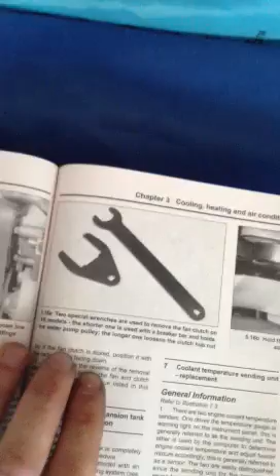Hi there. This video is for Ford Ranger owners who are trying to remove their fan clutch assembly or trying to remove the assembly so they can get to their water pump. The problem I had is that the manual that I have, which is the Haynes repair manual for Ford Ranger pickups, shows the use of a special tool to get at the fan clutch assembly.

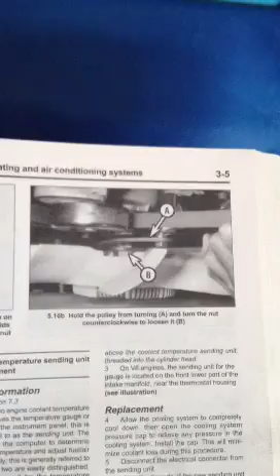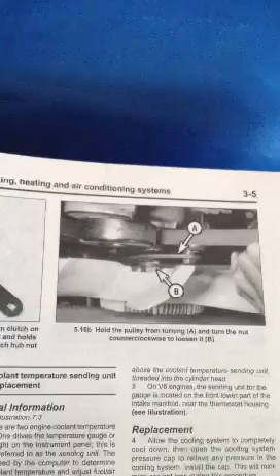The problem is that I have a 2006 Ford Ranger, and the equipment inside my engine bay doesn't match what comes in the manual. The problem is that there is nothing for this tool to grab onto. The nut on the axle of the fan clutch assembly is there, but there's nothing square to put any kind of wrench on the side of the water pump or the water pump pulley.

So I tried several things. Looking at videos, I tried various kinds of strap wrenches to hold the pulley still while I turned the nut. No luck. I even tried heating it up with a torch. That didn't work either. What I did find worked, and I'll show you guys how to do this in just a second, is I came across another page in the book which shows using a crankshaft pulley holding tool in order to hold the water pump still while I turned the nut on the fan clutch assembly.

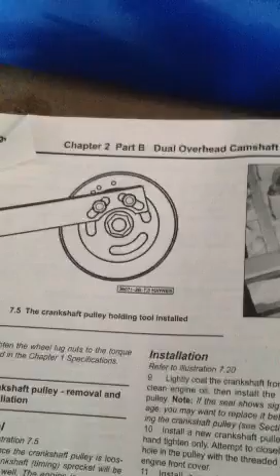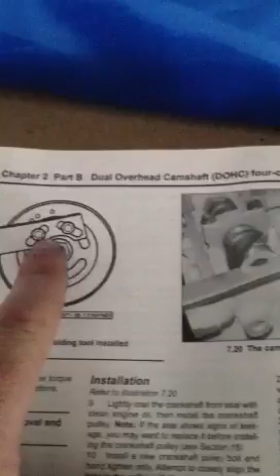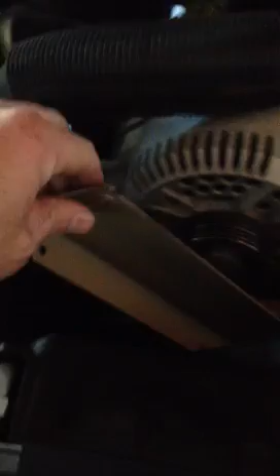I have a crankshaft pulley holding tool, but I guess the slots are too big. They just didn't work for the water pump. So what I did is I took a regular piece of shelving strut here that comes on these type of shelves that I have in my garage, only a little bit beefier, and I cut out holes that match this size. I just took some measurements on the water pump, and I attached it.

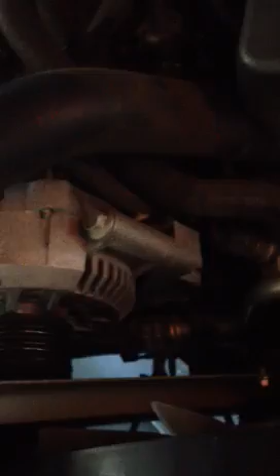Let me get the drop light here for you guys. I took off the pulley to the water pump and just slid it down the shaft of the fan clutch. You can't take the pulley off, obviously, because it hits the fan. So I did drill those two holes, little slots, and attach that to the water pump. And so now that holds really still. And if I can demonstrate, you can hold that still.

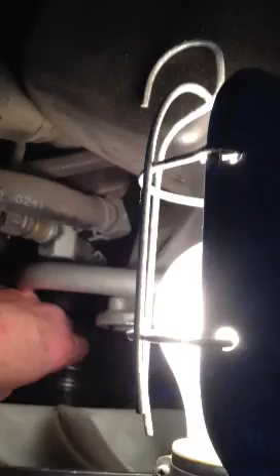So then you move the pulley out of the way, and you can see the nut that you have to put a giant wrench on. So what you're going to do is you're going to take a huge adjustable wrench. This is how big of a wrench I'm using here, a big old 18-inch adjustable wrench, or if you have a really long 20-millimeter wrench. So you're going to put it right there.

So we've got our piece of strut right there holding the water pump still, and then this is the fan clutch nut that I'm holding. This has opposite threads, or left-handed threads. The fan turns this way, and it unscrews the same way. So I'm looking at the front of the vehicle here. So you're going to turn the adjustable wrench towards the battery, so that's to your right, or clockwise if you're looking at the threads. And it popped right off.

I had to get up on a ladder and stand over it and push down really hard on this strut, and then really hard on the wrench, and it did come loose. So now I can remove my fan clutch assembly.

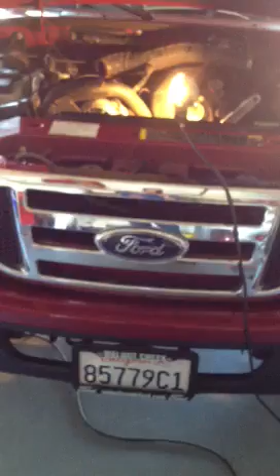This particular vehicle is a 2006 Ford Ranger with a 3.0 liter engine. The manual says that the smaller engines actually have the opposite thread, so the thread comes off in the opposite way that the fan turns, and the 4 liter is the same way, it comes off the opposite way. So it's the 3 liter, I think, that turns clockwise.